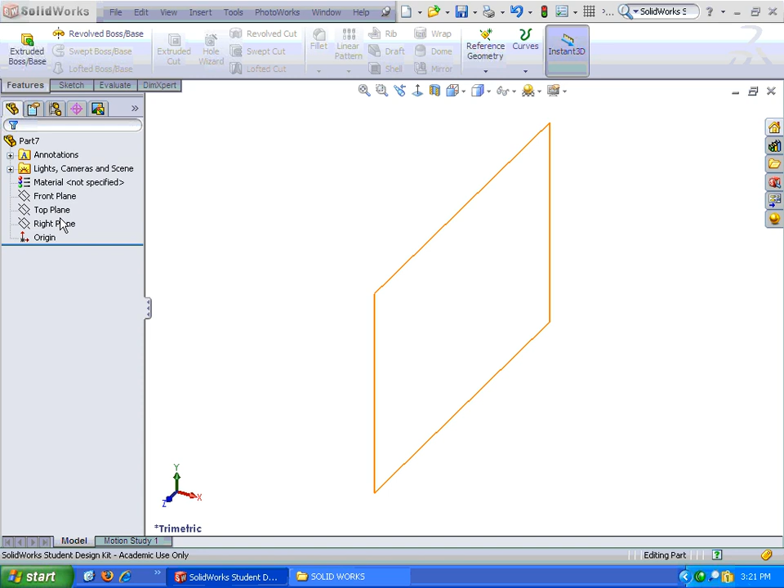Alright, lots of places we could start on this one. Let's go ahead and start on the top plane. I'm going to click top plane and immediately hit the sketch button. It rotates it, and I know my sketch is active because I can see the grid.

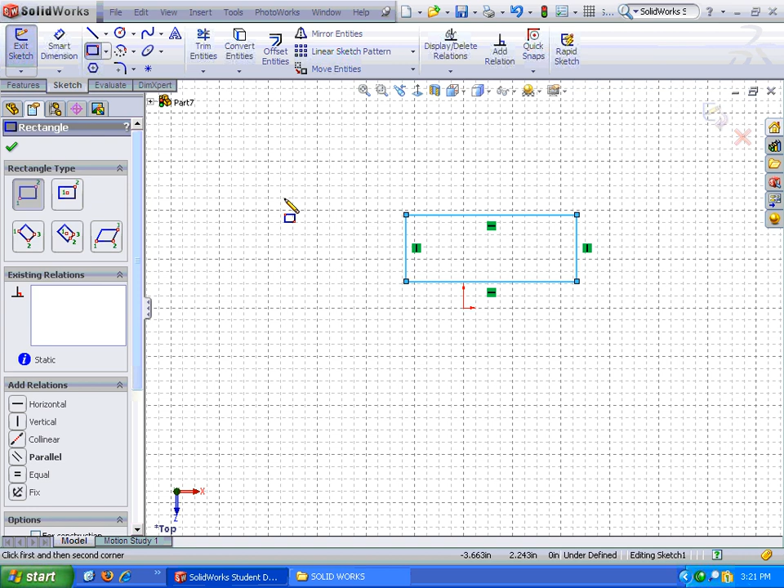Let's go ahead and start sketching. First thing I'm going to do is draw a rectangle, but I'm not going to tie it to the origin yet. Let's go ahead and put some dimensions on this rectangle. The height, or the depth of it, is 1.5, and the width across here is 3.25.

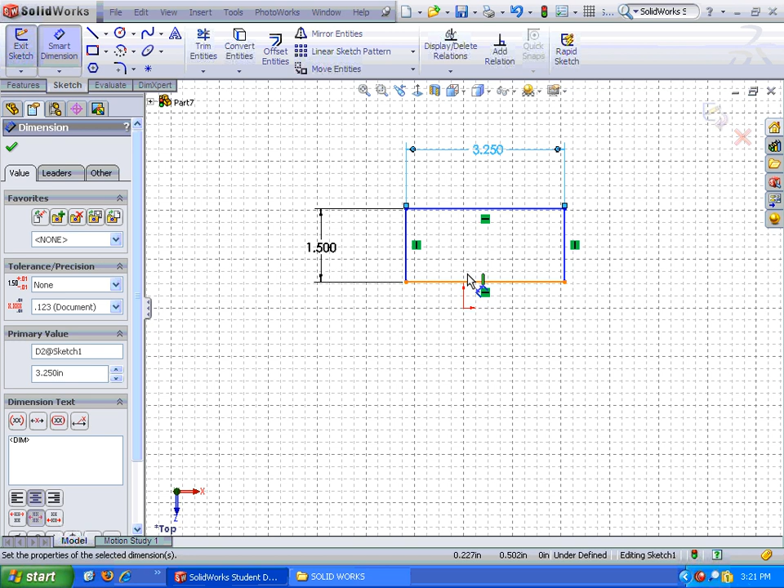Now we're going to tie it to this point. I'm going to go up and go to Add Relation. I'm going to click on the line and the origin, and go midpoint. Now it's tied in. Hit the check mark.

Now we can extrude it. That's under Features, Extruded Boss Base. I believe our height here is 0.375. And click the check mark.

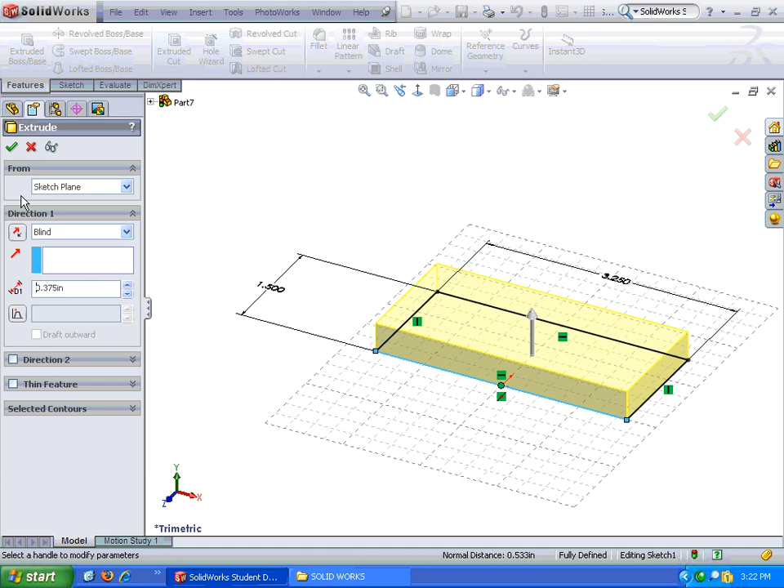Alright, now let's go ahead and sketch in our profile for the actual support portion of it. I'm going to click on this surface, turn it normal to, right click and put a sketch on it. And let's move that up just a hair.

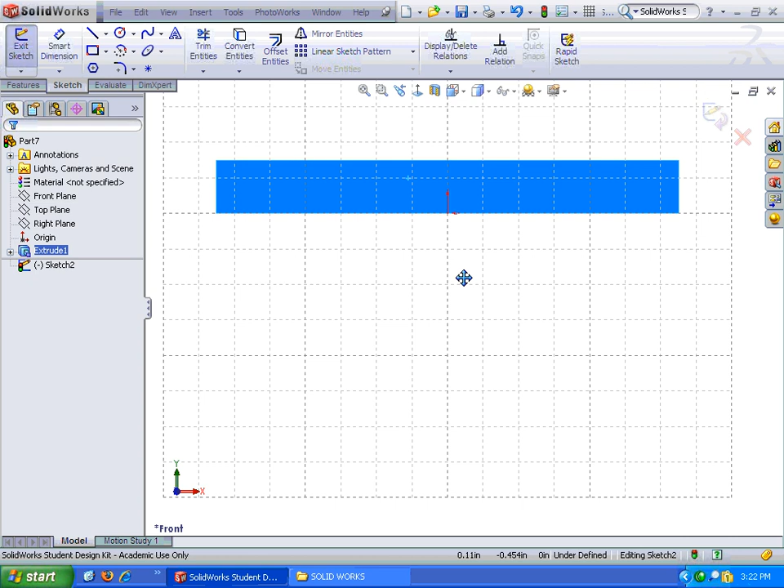First thing I'm going to do is draw a center line from the origin straight down. Okay, now let's put a circle on that center line. Whoops, it's drawing another center line. Circle on the center line, doesn't matter where, just make sure it's not clicked into the center or something.

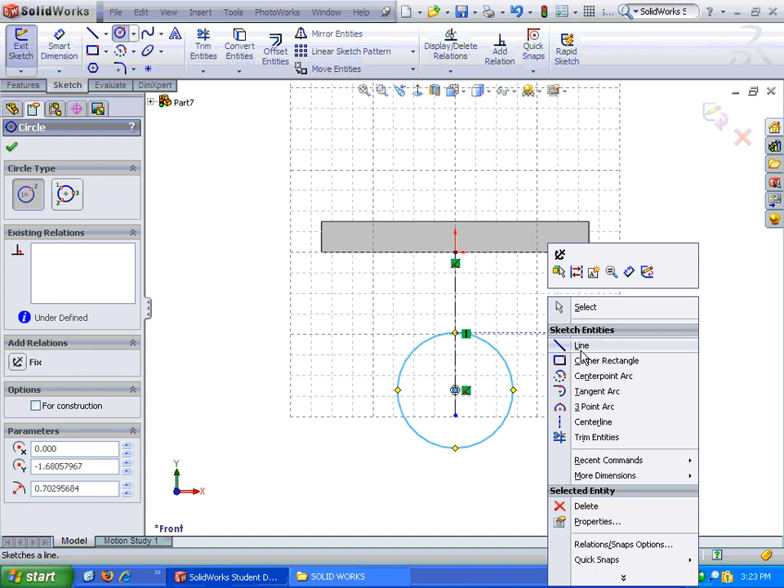Alright, right click and we can go to line. I'm going to go from the edge of the circle to the corner, and then just follow this around so that my sketch is closed, and come back, making sure I get the tangent symbol in there. Alright, now let's start putting some dimensions on.

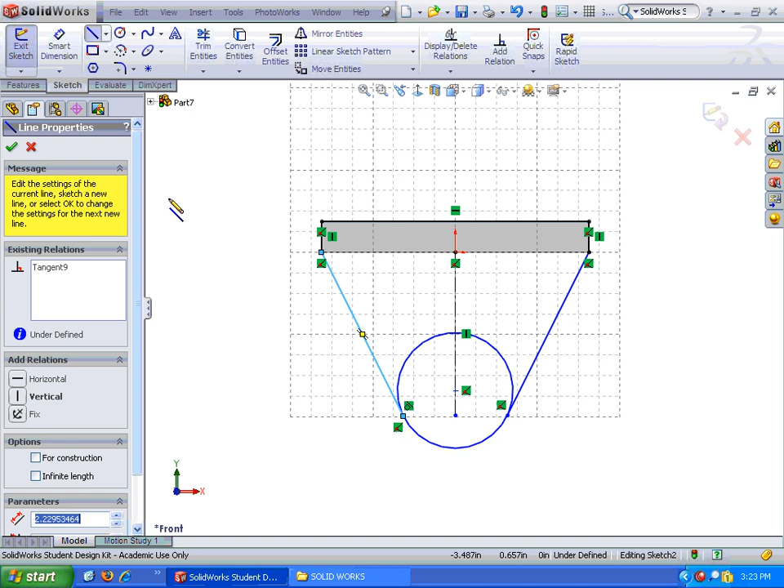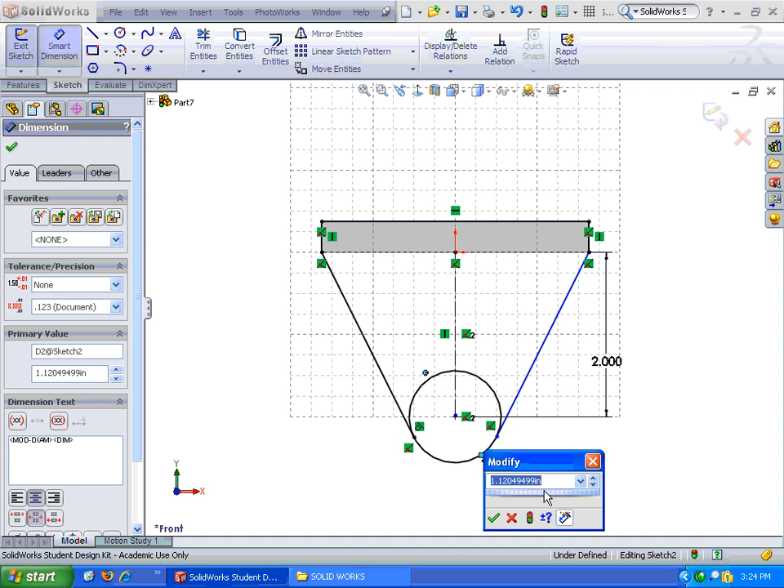The distance from here to the bottom, or the center of my circle, excuse me, is 2. The diameter of my circle says it's a 0.75 radius, which would be a diameter of 1.5.

Okay, and let's go ahead and trim. Let's trim to closest, and we'll trim this out. Now notice down here I have 2 little dots, which means I am not tangent.

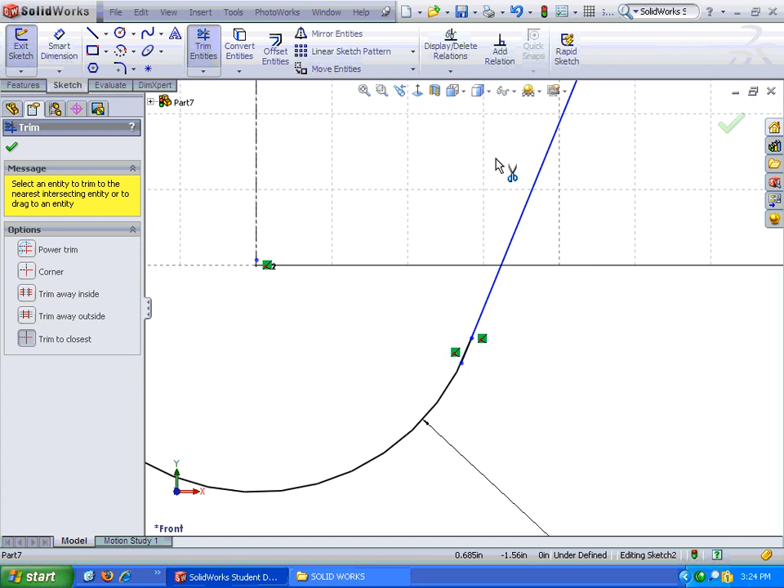So let's go ahead and make those tangents. I'm going to hit Escape to get out of Trim, go into Add Relation, take that line and this arc, and make them tangent. There we go.

That looks much better. Alright, now I'm ready to extrude. So I'm going to go to Features and Extrude.

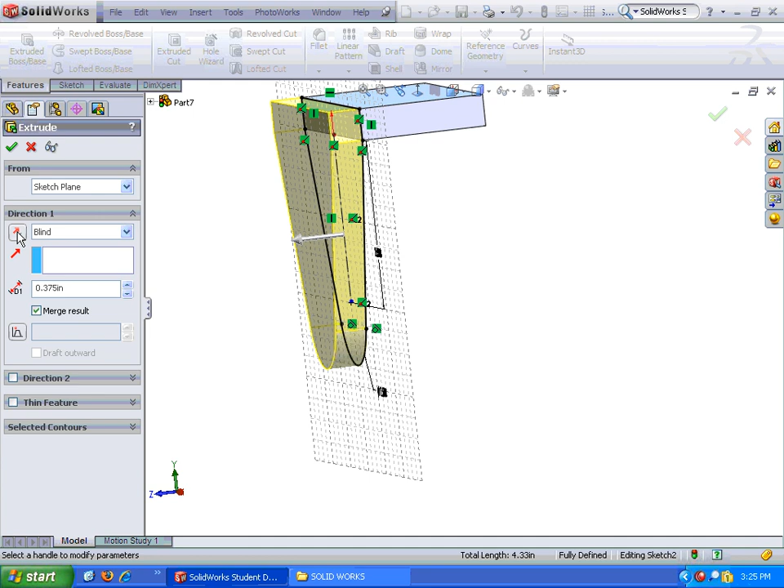And go ahead and rotate this. Remember that the total right here was 1.5, so if I add on to that, I'll be going the wrong direction. This little button right there is called reverse direction, so if I click on that, it will go the other direction. And the other direction, I want it to be 0.375, which is what it's set at. So I can hit the check mark.

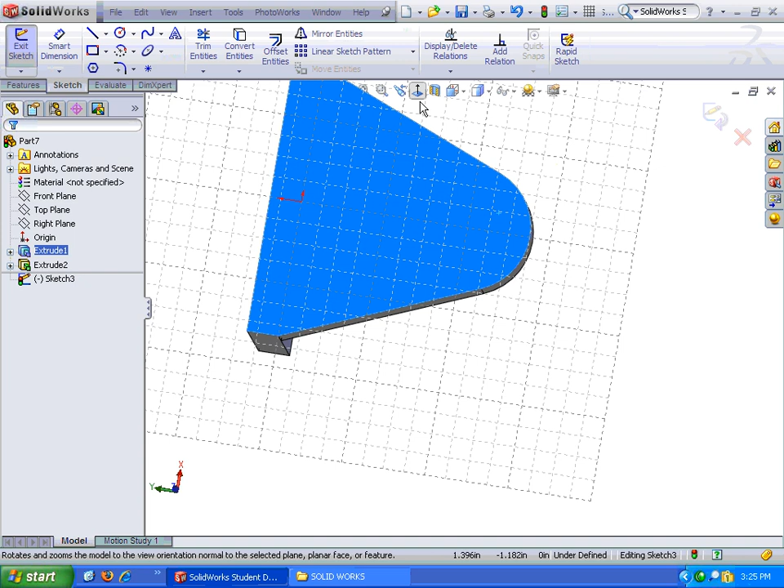Alright, let's put our circle in here that comes out a little bit. I'm going to click on the surface, click on Sketch, click on normal to, click on circle. I'm going to hover over the arc, it'll give me the center point, and I'm just going to come out and tie that in to that arc. I don't even have to dimension it.

I can go to Features, Extruded Boss Base, rotate this so I can see it. It's good, it's extruding the correct dimension, and I believe that dimension is—I'm glad it tells me—let's go 0.125, and hit the check mark.

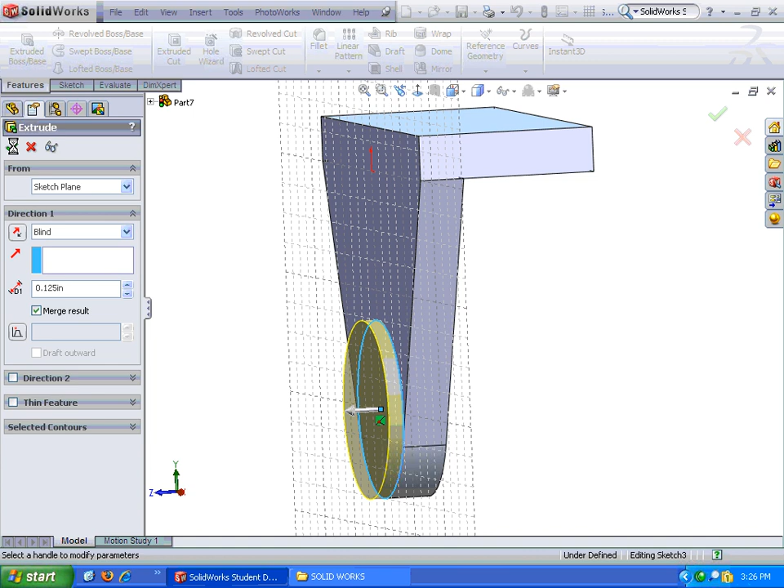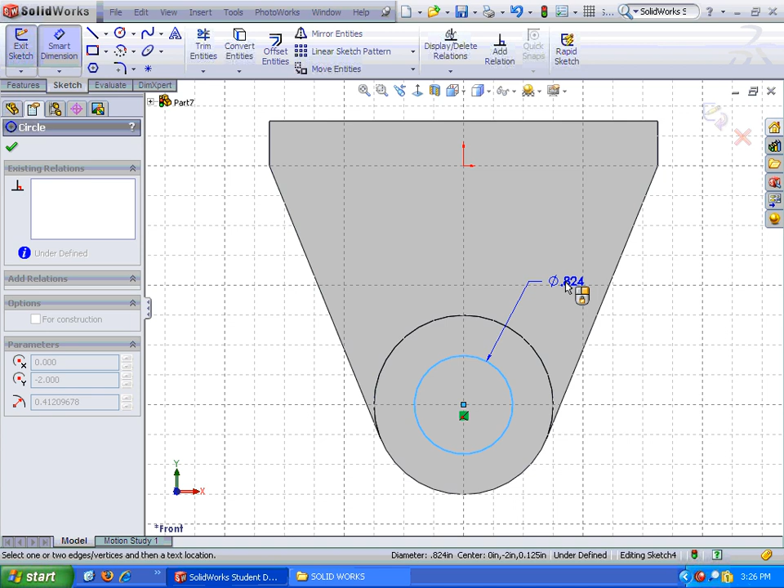Alright, next thing we're going to do is put the hole in this since we have that. So I'm going to click the surface, sketch on the surface, normal to, circle, find the center, put the circle in, right click, smart dimension, click on the circle, and its diameter is a diameter of 1.

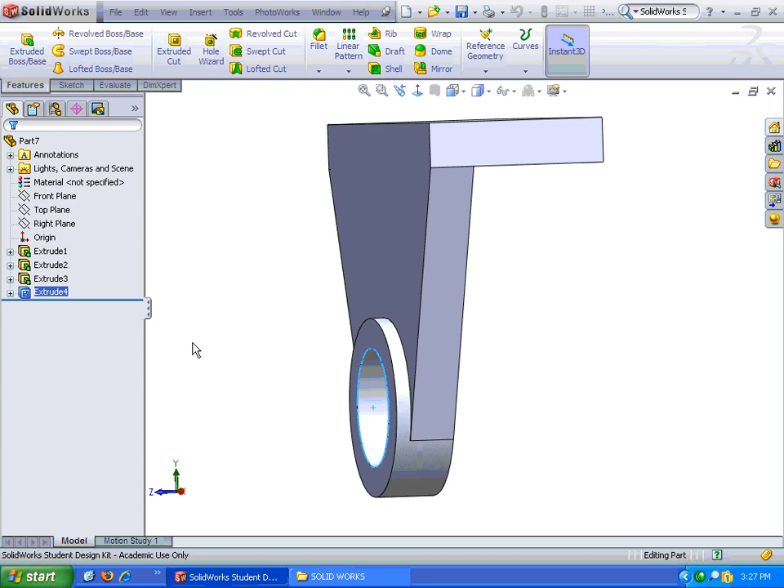Okay, so its dimension, let's go to features, and this time instead of extruding we're going to cut. So I'm going to click on cut, rotate it, and let's go ahead and set it through all, and click check mark. So there's our circle. Let's put a couple of fillets on here.

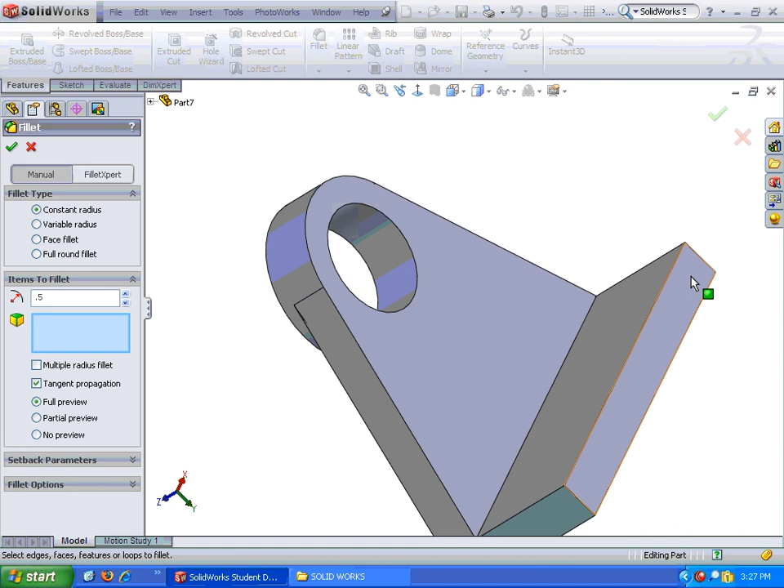So the fillet command, remember, is on the features tab, fillet, and my fillet should be a radius of 0.5. Remember, I'm going to click on the edge, which is the little stick going up and down. Surface is the box. So I'm going to edge and edge, 0.5, hit the check mark.

Alright, now I'm ready to put my counterbore holes in, and they go on this surface right here. So let's go ahead and click that surface. I'm not going to put a sketch on it though. The hole wizard is located on the features tab of the command manager. So I'm going to click on hole wizard. I'm not in a sketch. So I'll click on hole wizard.

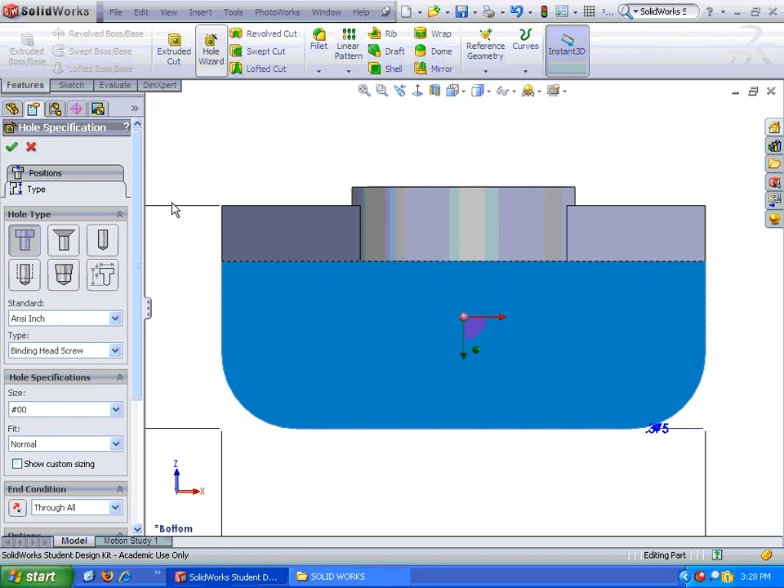A couple of different options on the hole wizard as it boots up. We're going to click on this one right here where I can select the type of hole I want. So it's like a customized hole. I'm going to use a counterbored hole, and I wish this would not disappear when I do that, but my inside diameter

I have to get in there to edit it, 0.375. Don't worry about the depth because it's going to go through all. My counterbore, oh here it is up here now, my counterbore diameter is 0.625, and my counterbore depth is 0.125.

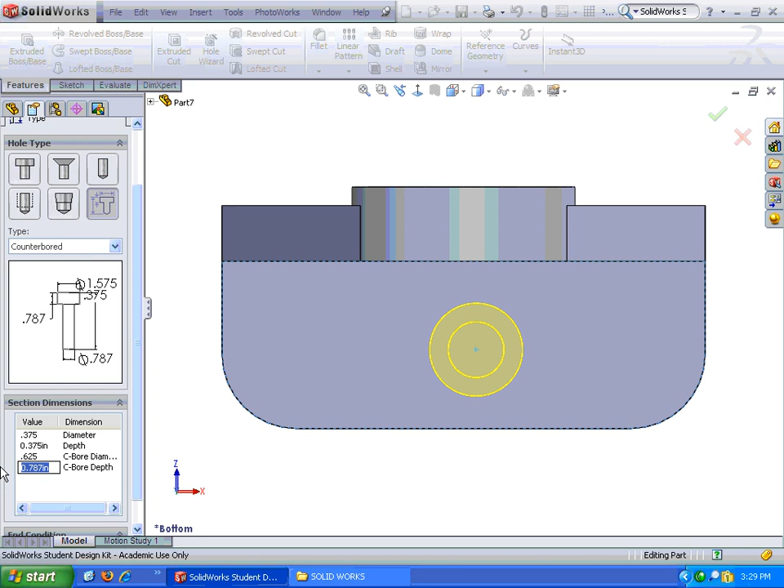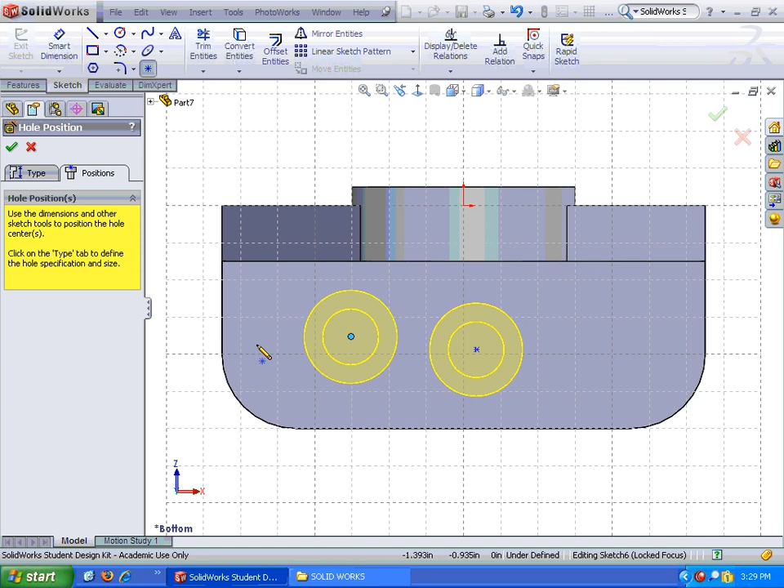So there's a preview of what it is. Now I'm going to go back up to the top and click on positions, and I'm going to move that. I lied, I'm not going to move that. I'm going to click another one in. Then I'm going to find the arrow button wherever it is hiding. There it is. Right click and select.

Now I can move those, and I'm hovering again over the fillet to find the center point. Remember, it was a right click to get into that arrow. Once I have all those done, I can hit the check mark. Hit the check mark again, and my counterbore holes are there,

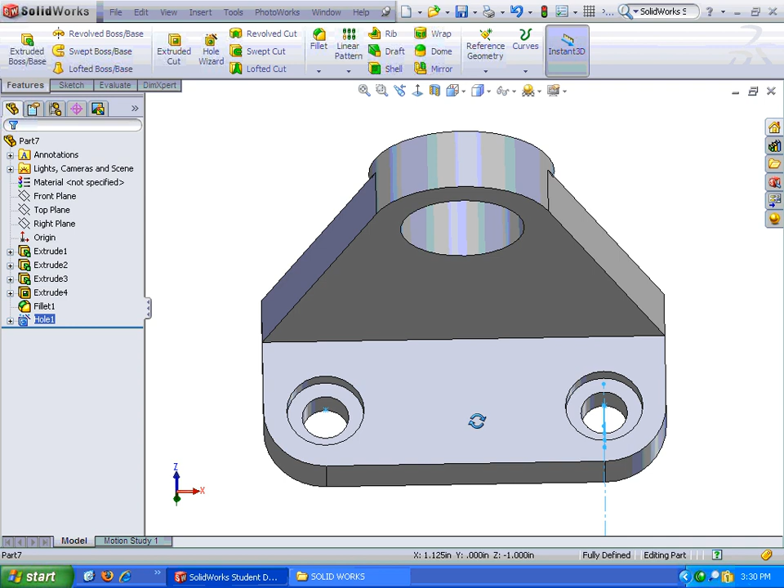and we are ready to save this out. Oh, I lied. We need to put the fillets on. Let's put the last fillets on. The fillet command is there on the features. If you don't do these fillets in the right order, they have a tough time working.

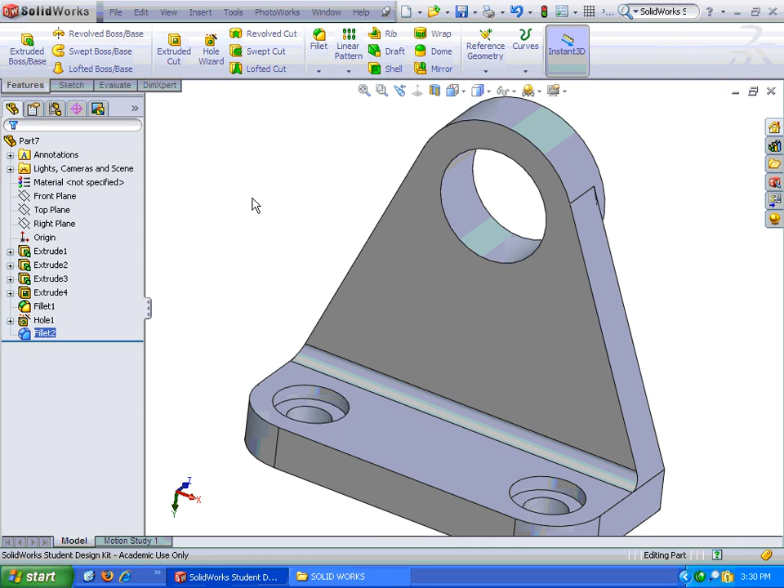Let's go ahead and change the distance to 0.125. And I'm going to click this one first and hit the check mark. I'm going to go to fillet again. This time I'm going to click this edge, and it should follow it all the way around, which it does. And I'm going to hit the check mark again. Now we are ready to save that out as the axle support.